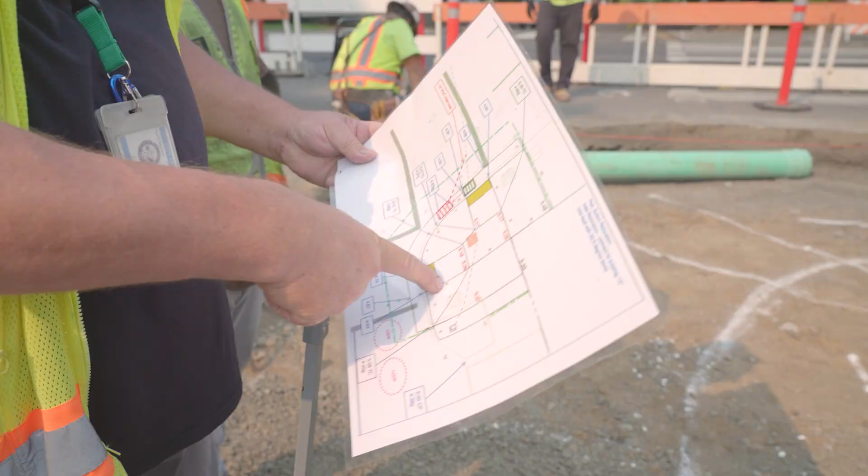These ramps may not look like much, but they're actually highly engineered pieces of infrastructure designed to help everyone, including you, get around safely. That is, of course, if they're built right and inspected to prove it. That's where you come in. These videos will help get you oriented, give you some tips and techniques to help get it right the first time.

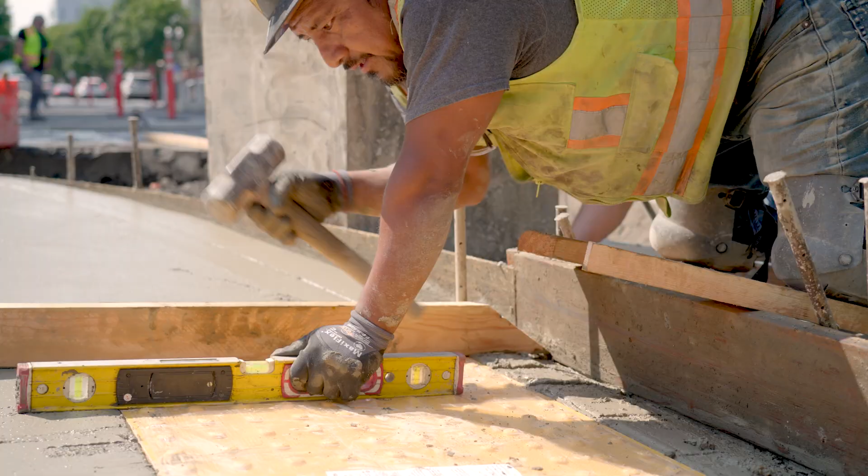To make sure that we meet federal and local standards. And who knows, maybe at the end of the day, we could take all these specifications and turn them into something that you can be proud of. Let's get started. Why not just pour a simple ramp and call it a day?

Well, the ultimate answer is because all of these ramps need to meet ADA standards, which are very, very specific. As specific as they are, though, these standards are based in basic common sense. The steeper the slope, the more difficult and dangerous it is to get around. And this is why every ramp we pour has two key components that we're going to be checking constantly to make sure that we're getting them right, because they're so critical to our mission.

The first are the parts that take you up and down. These parts need to be gradual enough so that most people can manage them. The second are parts that don't take you up and down. These are the flat, level areas that provide a safe place to rest and make a turn while traversing the rest of the ramp. Next, let's take a look at how these basic parts add up to form the basic components of our ramp systems.

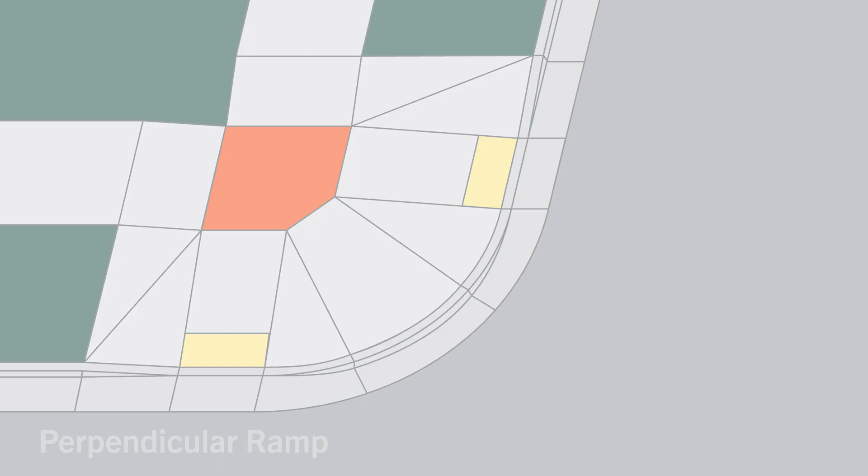First, we have our landings, or turn spaces. A landing is a flat area, 2% or less, which provides a safe space to rest while using the ramp. It's important that the landings don't exceed 2% so that wheelchair users and others can safely navigate the features of the ramp system. Connecting the landings with the rest of the pedestrian infrastructure are the actual ramps, which largely serve to change elevations from the sidewalk to the roadway.

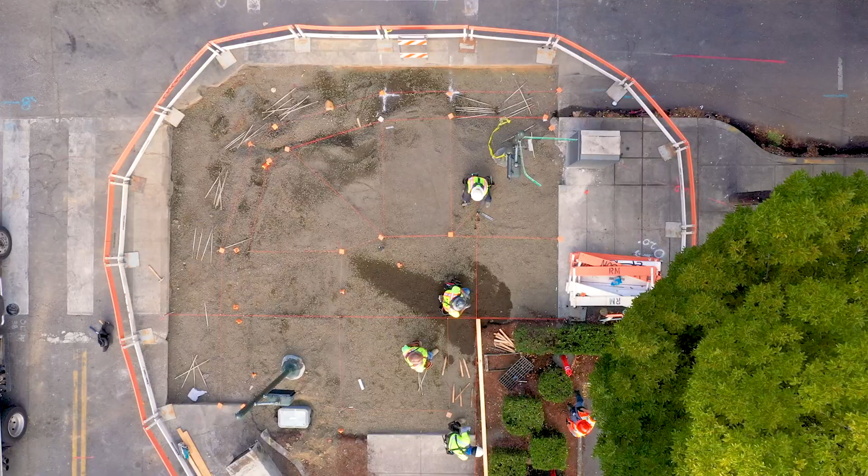These two features form the heart of any ramp system. Surrounding them are a number of other components, like truncated domes and flares. These elements of a ramp system serve to connect the core of the ramp to the surrounding existing infrastructure. They're all designed and constructed to exacting specifications as well, and each component serves a specific purpose. Let's take a look at how all these elements add up to form the basic ramp styles.

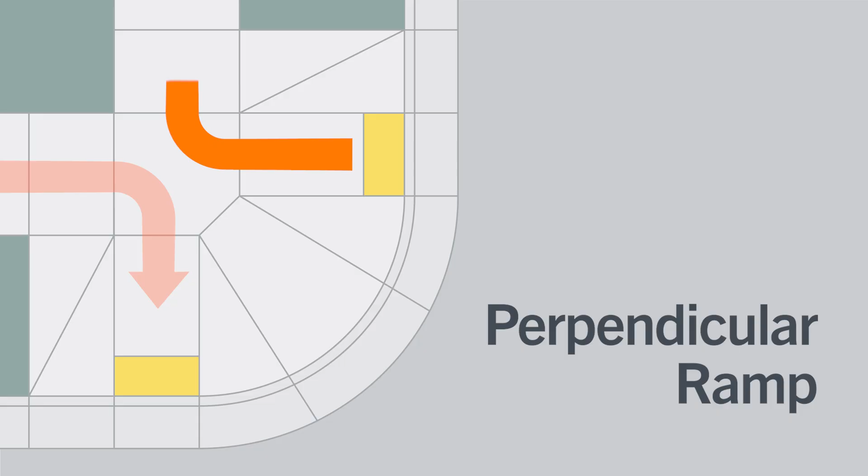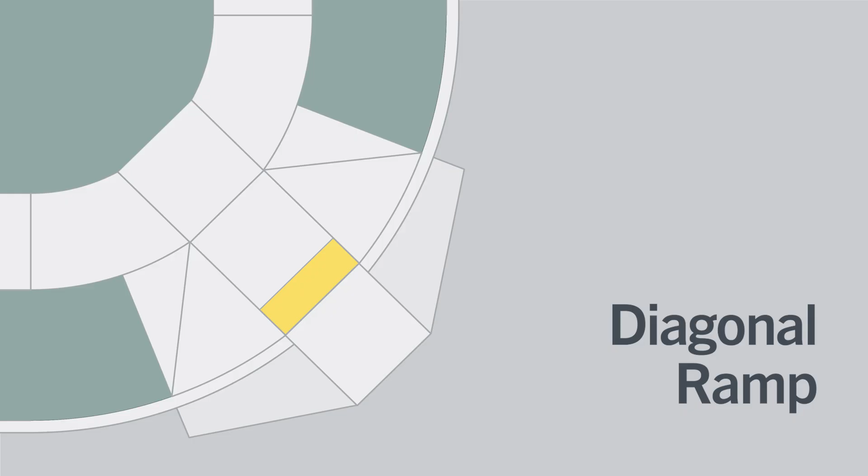Our first ramp style is the perpendicular ramp. These ramps are perpendicular to the face of curb. To use this ramp, you're probably going to have to make a turn. Diagonal ramps serve multiple crossings. For this ramp style, you need a flat, level turn space at the top and bottom of the ramp. And the bottom of the ramp must be outside the traveled way. Two landings to make your turns, connected by a ramp. Parallel ramps are parallel to the curb and are oriented in line with the path of travel on the sidewalk.

So all of this should really illustrate the importance of having folks who are well versed in the tools of the trade, including a smart level to measure slope. Because at the end of the day, it's the difference of 1/10 of 1% of slope that can mean the difference between a ramp that meets standards and a ramp that you're going to be rebuilding on Monday. So at this point, you're really beginning to see that building and inspecting these is going to take a lot of care and attention to detail.

So again, the question, why even bother? I mean, to me, making the city that I live and work in into a more accessible place for everyone, that's reason enough. The reality is, everyone in the community benefits from a friendlier, more accessible infrastructure. And it should be a point of pride in being able to take a part in building and inspecting it, especially considering how tight these tolerances are. I mean, most people would have absolutely no idea how to build or inspect these.

So next, I'd like you to go ahead and find the video that pertains specifically to the work that you'll be doing to pick up some more tips and techniques along the way.